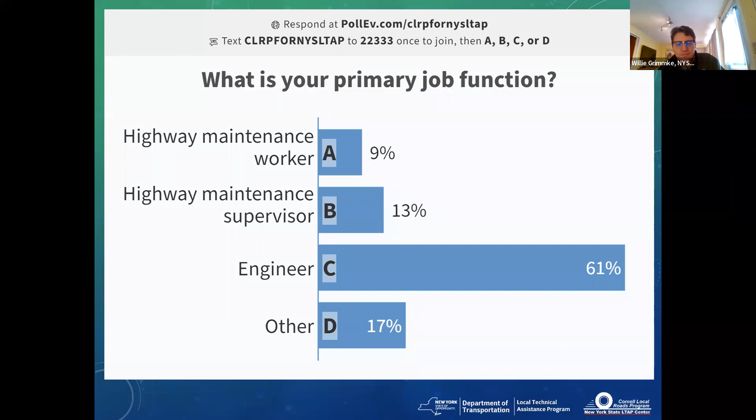So right now, we've got the survey up. What's your primary job function? Highway maintenance workers, supervisors, engineers, or other? And it's looking like we have mostly engineers, a super majority of engineers.

Okay, how long have you done this kind of work, highways and drainage? So it looks like we've got some new people, we've got some folks that probably can give me some instruction, and folks in between.

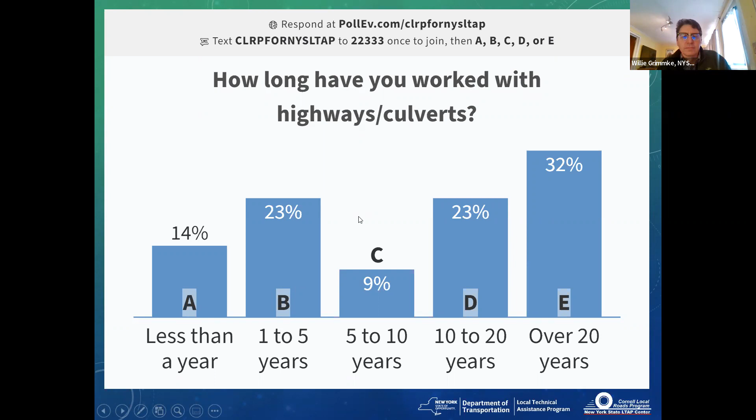Okay, now, if you're responsible for culverts in your inventory, how many do you have?

And it looks like a plurality at this point has over 100. That was my experience when I was in county government. We had some 100+ bridges, and we had well over 200 culverts in the 5 to 20 foot range.

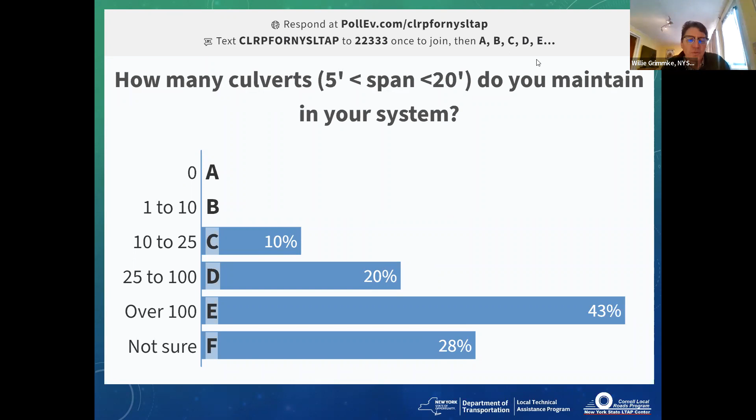Okay, so before I go into the terminology and nomenclature, I'll deal a little bit with why are we here and even having this discussion. You'll see from some of the photos of failures that when a culvert doesn't take the water it needs to take, or it starts to fail, inherently it will cause the road around it to fail. We're trying to keep our roads functional, working, not overtopping, passing enough water so we don't get flooding issues, and not just washing out and having problems with our road that we're going to have to fix.

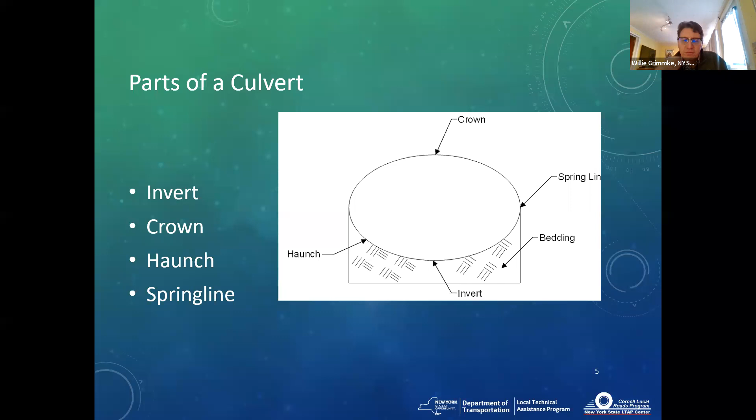So basic terminology: invert is the portion at the bottom of the culvert where the water will flow during low flow situations. The haunch is the area between the invert and the spring line, underneath the culvert where it's supported, the earth area that's supporting the culvert. The crown is the top of the culvert, and the spring line is the widest point in the culvert. That is part way or midway up. Halfway up on a round culvert, it'll be at a different location at a pipe arch.

Okay, and then this is a longitudinal cross section. Sometimes we'll have aprons at the inlet and outlet, which will help to minimize or prevent erosion. Sometimes there will be a toe or cutoff wall, either from the opening of the culvert or from the edge of the apron, which will reduce scour potential. There may be wing walls to retain the embankment that the culvert's buried in. We may have a head wall or parapet.

A number of pipe type culverts will have joints, and the barrel of the culvert is basically the wall of the pipe.

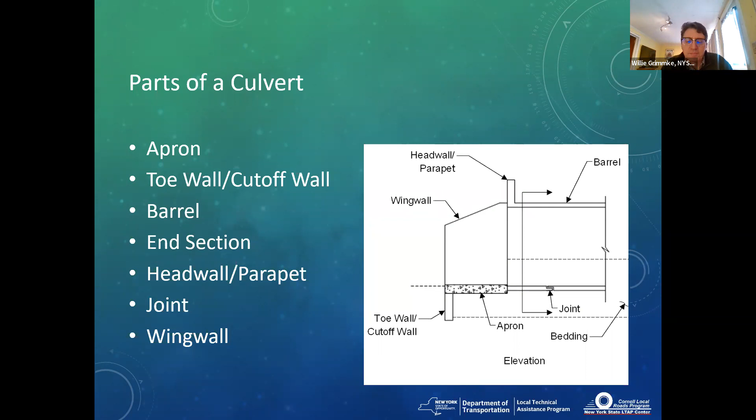Culverts can come in a variety of shapes. They may be round. We may have square boxes. We may have bottomless boxes. We may also have arches, pipe arches, or bottomless corrugated arches.

Materials: concrete is one of the common materials. We had a number of concrete culverts in our county system that had been installed back in the 40s, 50s, 60s. Concrete is rigid. It needs to be adequately bedded when it's set. You have joints every 8 or so feet apart. The nice thing about concrete culverts is you have a smooth interior. Sometimes they can be skewed, but installation of concrete culverts is dependent on having them adequately bedded.

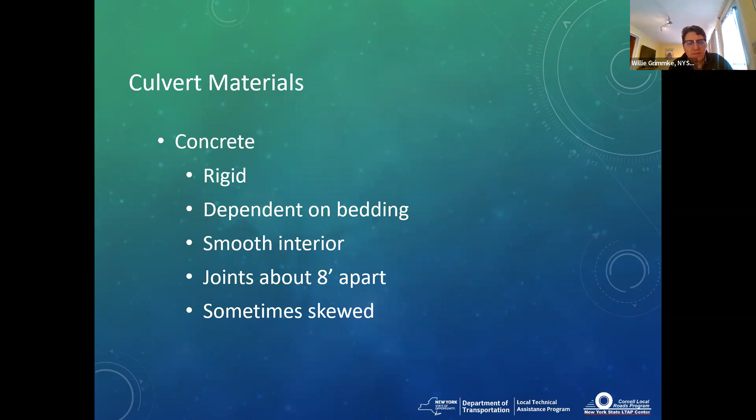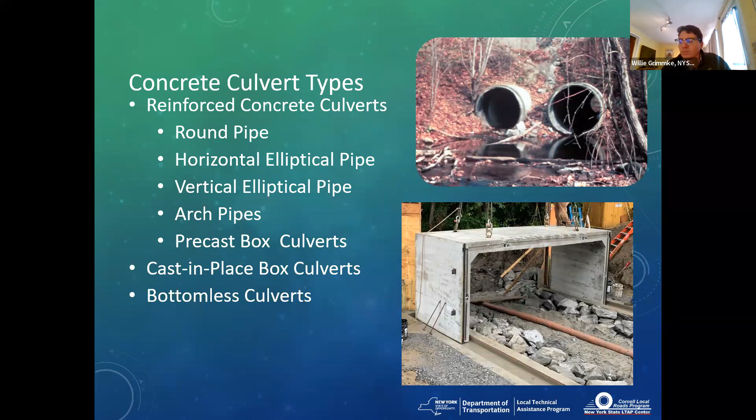Okay, we have a question: for an embedded culvert, do you seed the bottom with riprap at installation time, or just let the stream sediment transport fill it in? I'm going to give you the definitive: it depends. In the photo we're showing here, there is riprap protecting the footing, but natural stream bottom down the middle. That is a common situation with new bottomless culverts, where there will be some sort of armoring along the face of the footing, and then natural stream bottom in the invert area.

Okay, another material: corrugated metal. It is flexible, but the corrugated metal is dependent on the interaction with the surrounding soil. To some degree, the corrugated metal pipe is a form, and the soil is basically doing the work of carrying the loads from above. Corrugated metal does have a rough flow surface, and the joints are going to be about 20 feet apart.

Metal culverts, typically steel or aluminum. You can get the round ones up to 15 feet in diameter. Some plate pipe arches, you'll get up to 50 plus foot spans. And like I said, the material is somewhat flexible, so as the soil moves around it, you can get some deformations in your metal pipe. In solid pieces, round pipe, the joints are typically 20 feet apart. However, with plate pipes or plate arches, it will be a series of plates with a more or less random spacing of joints based on the plate sizes.

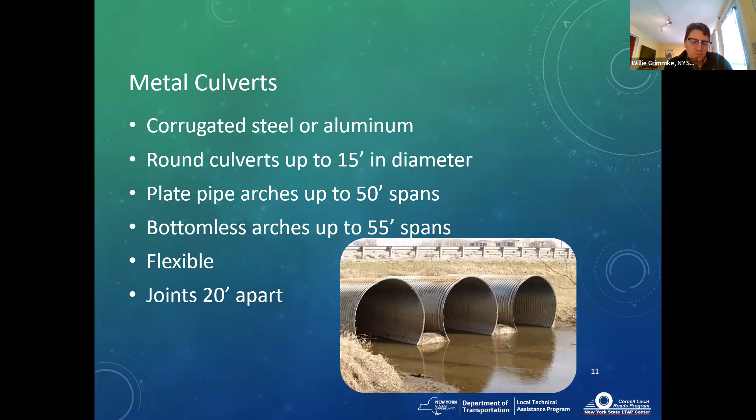High density polyethylene seems to be what's being used for mostly smaller pipes, 5 feet and less. Those are flexible, much like the metal pipes. Smooth corrugated, smooth lined are available. Also corrugated interior are available. And these two, like the metal, are dependent on that soil interaction.

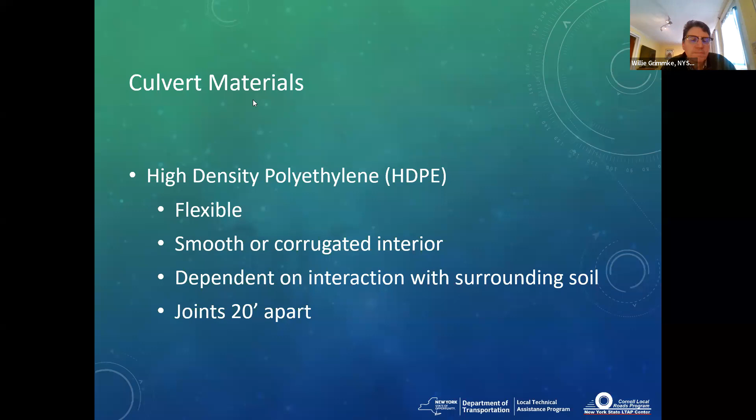This is one of the keys to the whole discussion today. If we properly install our culverts, it will help reduce the maintenance problems we have over time. If you don't install it correctly, you will probably be fighting with maintenance issues over time.

We had one culvert, it was actually a pair of them, and one of the two twins was not installed correctly, and there was a big dent in it. It was a bridge, and it was regularly being identified as a red flag because apparently when it was being backfilled, they backed over it with an excavator.

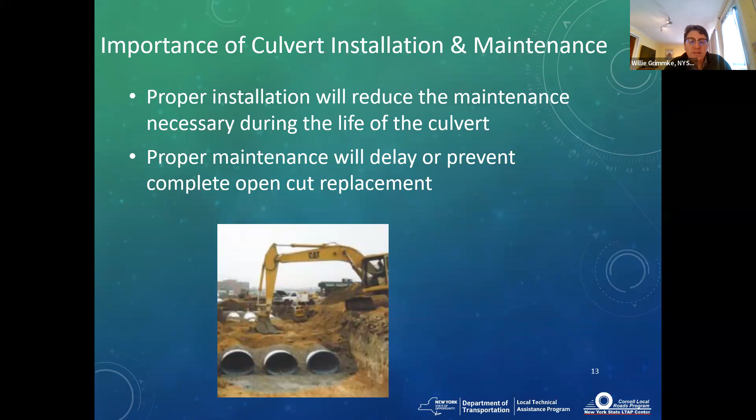But joints will leak if it's not installed correctly. It can deform, displace, and you'll have ongoing problems. And then secondarily, if you properly maintain your culverts, you can postpone or delay having to dig it up and replace it.

So common things we encounter are defects or problems we have to deal with our culverts from a maintenance situation: siltation and debris, leaking joints, settlement, scour. The coatings can be damaged on metal pipes, which will start to accelerate corrosion. We can have issues with our invert deteriorating from either scour or abrasion, or from corrosion. We can get localized damage, cracks and spalls, so a variety of things can go wrong.

So we'll start out with debris and siltation. This is one of those favorite twin tubes, and when you have twins, routinely what will happen is the stream will tend to migrate primarily to one, and we may end up with silt deposition and vegetation growing on that deposited silt, reducing the waterway opening and capacity of the assembly.

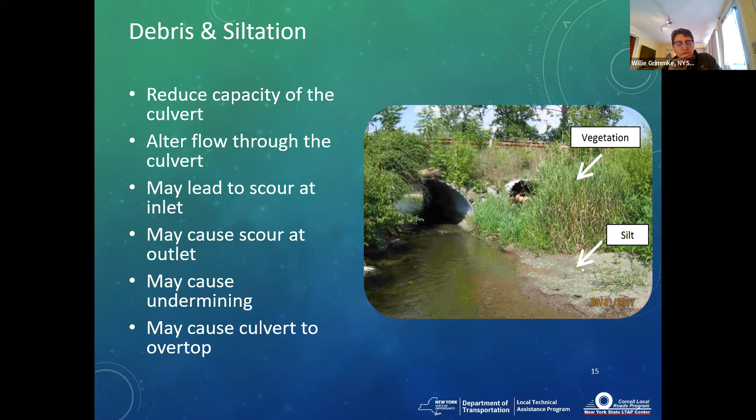This is a general, it depends discussion. Sometimes we want some soil in the bottom of our culvert because it's an embedded culvert and we want to have correct wildlife habitat. However, we're talking about soil that we're not planning to have in the culvert here.

It may be an indication of failed joints. It may be an indication of your stream situation changing and you're starting to get aggradation. But if you have a disproportionate amount of soil in your culvert, it can impair your waterway opening and your capacity. It also may be an indication that you've got joints failing or some other kind of failure that's letting your embankment fill up your culvert.

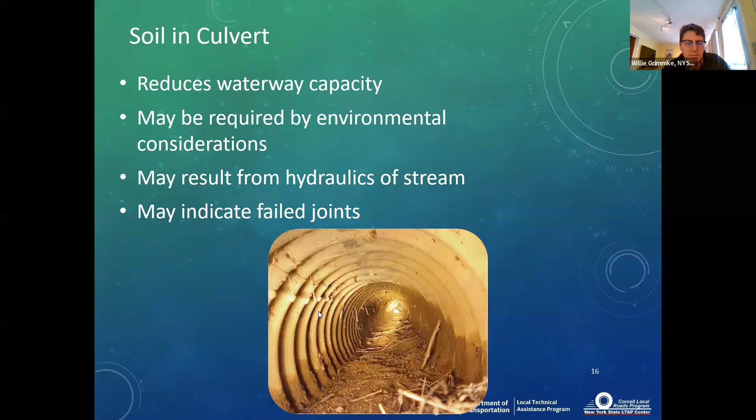Debris in culvert. So this was a fairly significant water flow event, and it discharged, washed a lot of debris downstream, and it got into this twin box culvert and impaired the waterway opening and actually caused overtop or exacerbated the overtopping. So the road overtopped, and as you can see, not only did the road overtop because the culvert couldn't pass the water, but the embankment washed away. So the road had to be reconstructed. This is a stark reminder why you want to keep an eye on debris in your culverts and keep them cleaned out.

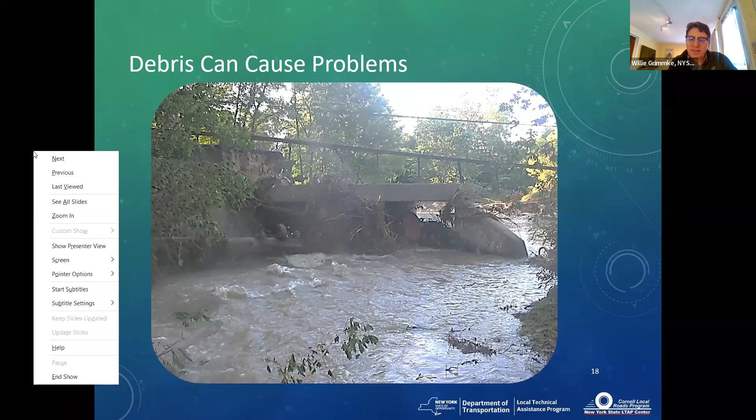So another issue we can encounter are leaking joints. They may have separated or misaligned due to settlement. They could be damaged during installation. We could have poor bedding and subgrade.

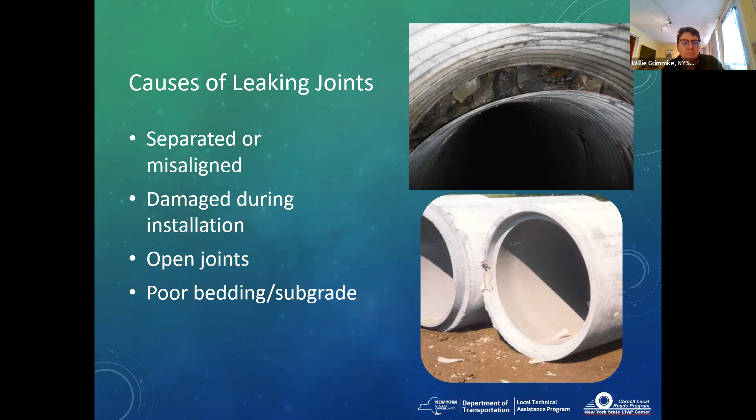One of the cases I observed recently is a lengthy concrete box culvert was installed under what was to become a 40-foot high fill, and it was installed on clay soils. A year later, when that was being inspected, we observed joints opening up between each box, particularly in the middle of the length of culvert, because that's where the highest fill was, and that's where we had the most settlement in the clay. So those joints all had to be sealed up to prevent the embankment material from migrating into the culvert.

Things that can happen with joint defects or open joints: in the photo you see, you've got water infiltration, and this is during the wintertime. So we're going to end up with ice forming. You can get soil infiltration.

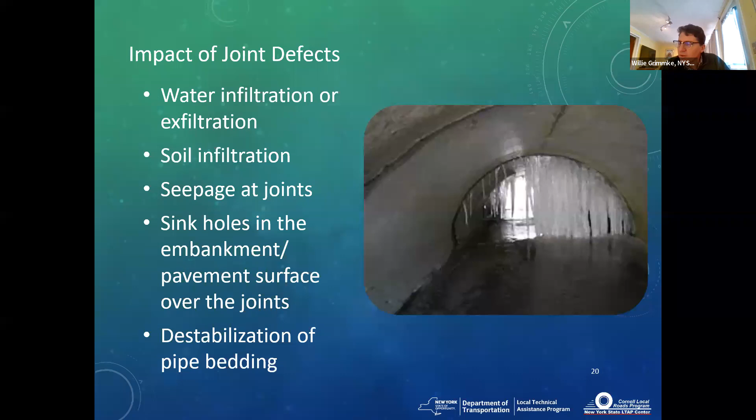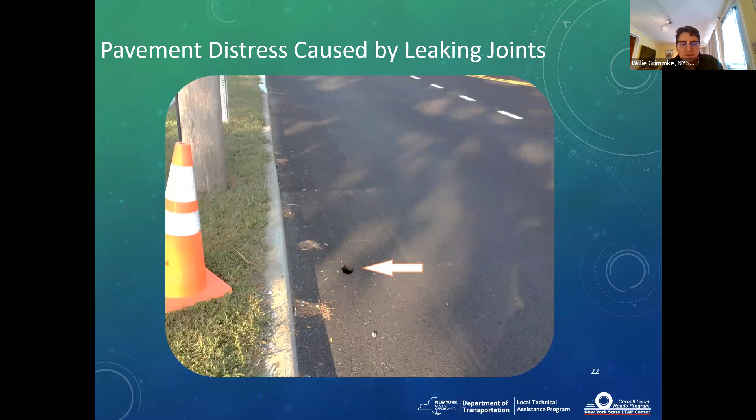This is a case where things on the surface don't really appear so bad. It's a small hole, but what was underneath that hole was a 4-foot diameter by 4-foot deep void where material had infiltrated into the culvert under the road.

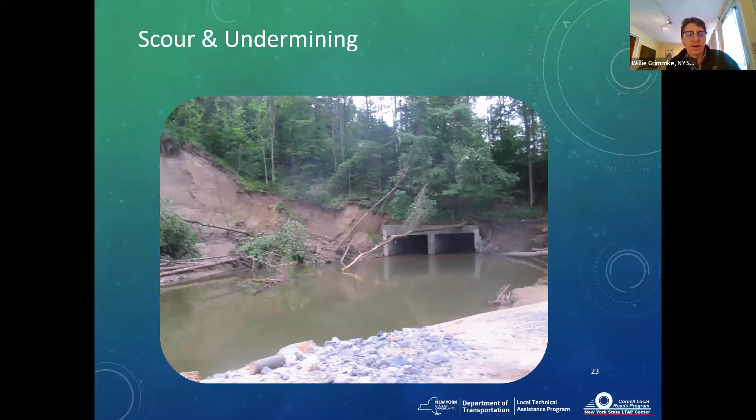Sometimes we can get scour or undermining. This was a twin boxes downstream from the ones we saw earlier. At this location, the embankment was high enough that it didn't overtop. The water coming out of that culvert basically scoured out that hillside next to it.

It can also make joint failures worse or more severe. And from a repair standpoint, you may not be able to reline it, because slip lining is probably not going to be an option unless you're taking a huge waterway area penalty. Here's another one that was deformed, and it's got kind of a bow in the top.

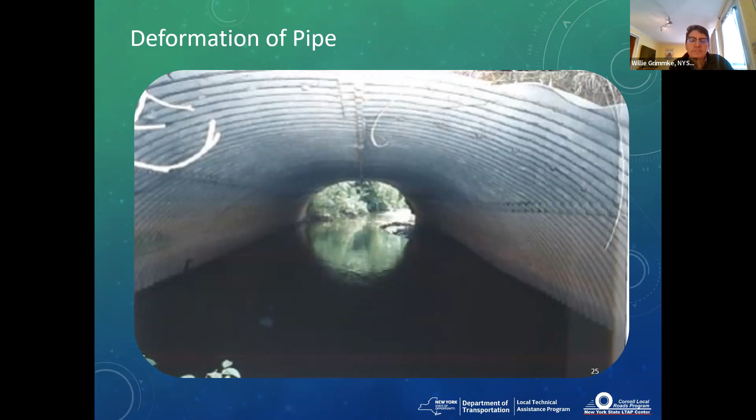We can get cracks and spalls in concrete pipe, like we often get in all concrete. How the pipe is cracking may indicate what the failure mechanism is and what happened during installation. If you have longitudinal cracks at 12, 3, 6, and 9 o'clock positions, it's often due to poor side support. You don't have adequate compaction at the sides of the pipe.

And if it's at like 5 and 7 o'clock longitudinally, it may be due to poor haunch support while the pipe was installed.

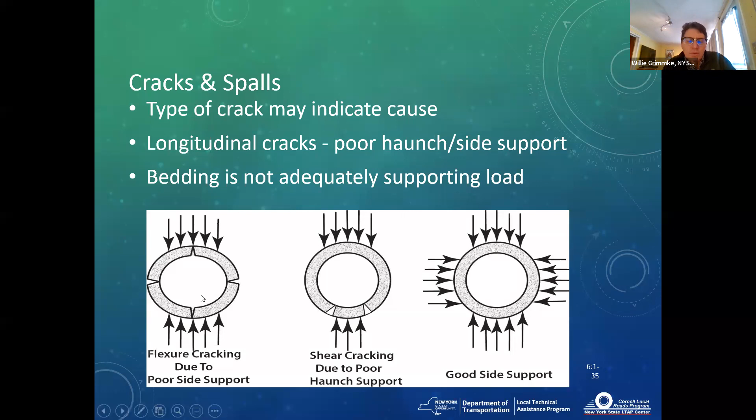If you have transverse or radial cracking, it can indicate how the pipe was installed or bedded. If it's at the invert, it'll be due to inadequate support in the middle of the pipe section. And if those cracks are primarily at the crown or widest at the crown, it's due to inadequate support at the ends of the pipe.

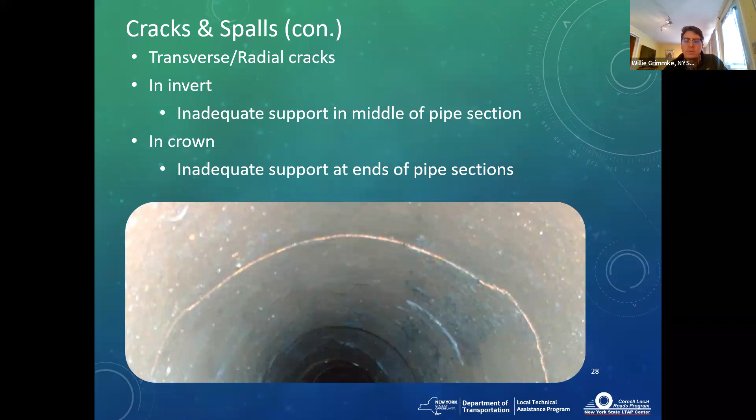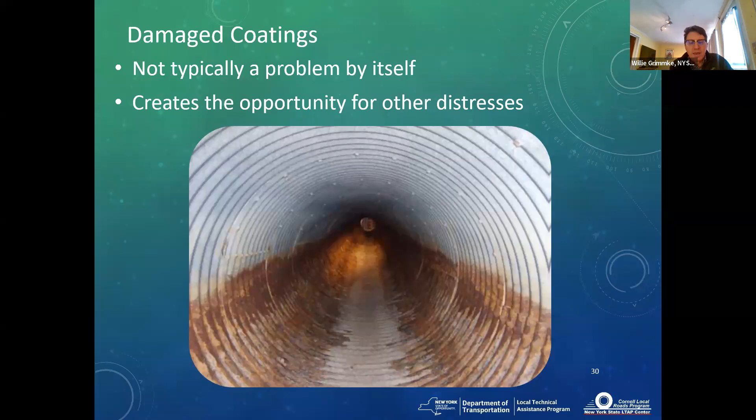We can over time have damaged coatings. This is a case where we've got a galvanized corrugated metal pipe, and I bet you can all guess where the normal high water mark is for this pipe. The galvanization is deteriorating over time. Now, this in and of itself isn't a huge problem, but what it means is that galvanization is no longer protecting the metal pipe, and the corrosion will accelerate over time.

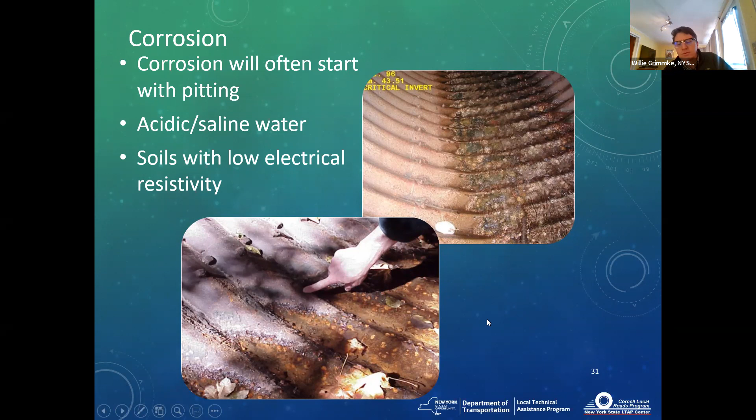How that corrosion appears, it will often start down in the invert as pitting, and then you'll get some flaking and rusting, and the steel will start to go away. Not all soils will support metal pipes. If you have acidic or saline water or soils with low electrical resistivity, you will get accelerated corrosion. I was in Wisconsin last week, and the folks at the DOT there do not use metal pipes because of their soils, and they have accelerated corrosion when they do.

Invert deterioration can happen in both concrete and metal pipes. You may have abrasive bed load, basically carrying rocks and sand that just scour it out, or you may have high sulfates in the water, which will deteriorate your inverts on concrete pipe. And if the invert deteriorates over time, it will weaken and destabilize the pipe as a whole.

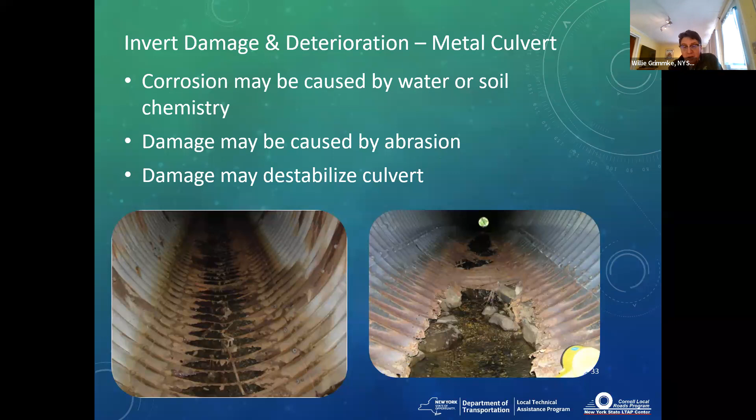Here's some metal pipes where the inverts are shot. Again, water or soil chemistry and abrasion in metal pipes. What happens is the abrasive bed load in the creek will scour off the zinc in the galvanized coating, and then the corrosion starts to work. As you can see with these, over time, with no invert, the pipe is likely to start deforming and collapsing.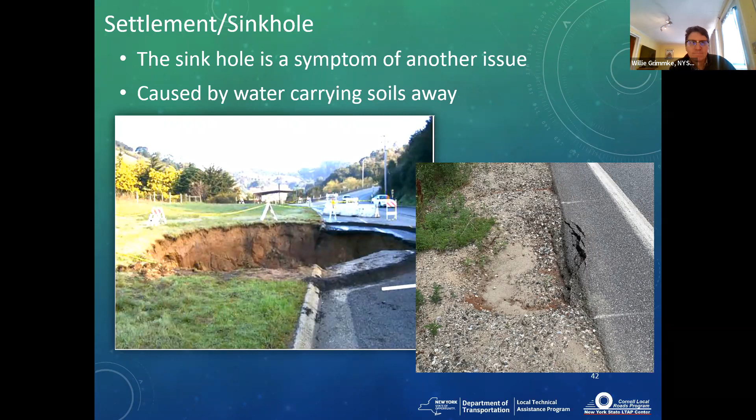Now, here in the photos, we have settlement and sinkholes, and basically water is carrying soils into the culvert and away. So you've either got an invert problem or a joint problem or some other issue where the settlement or the sinkhole, though it's a problem in and of itself, it's actually the symptom of another problem, which is some sort of lack of integrity of your culvert.

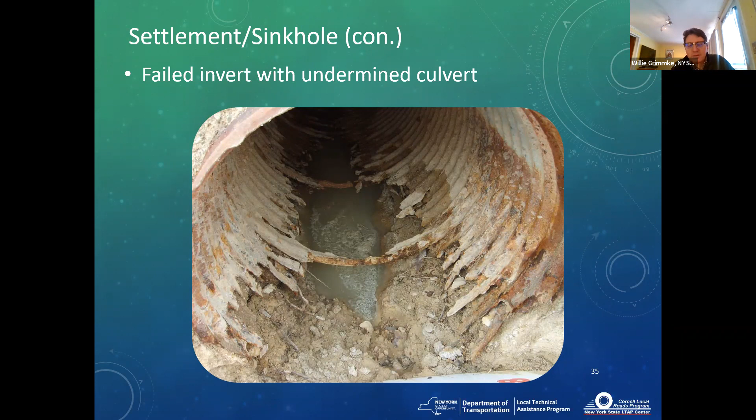So we've talked about all these things that can go wrong. What are some PM steps we can take to help make our culverts last longer? We'll start out with debris removal. PM, we get rid of debris, sediment, vegetation, so our culverts function like they're supposed to, and then we can talk about armoring for scour protection also.

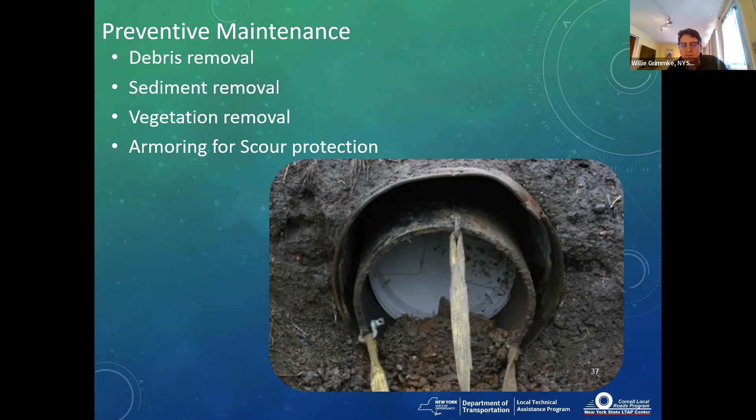How we remove debris or silt is highly dependent on the types of debris we have and what we're trying to get out of here. In this particular photo, we've got a stock fence with sticks and root ball hung up on it. That's the type of thing you can probably send somebody in to retrieve, or pull it out with a cable, something of that nature.

If you've got silt, like we have in the bottom of the culvert, we are going to want to look at a different measure, maybe digging it out. And again, this is a function of what our size of the culvert is and environmental restrictions.

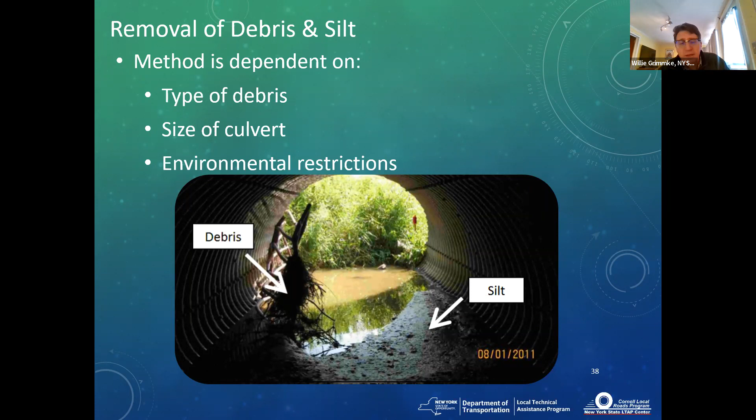So things we need to think about: cleaning it out. How are we going to contain the silt and debris? Because we're going to be beyond whatever nationwide permit or DEC MOUs we have, just letting it all wash downstream. And then if we're putting somebody in there, we need to be concerned about confined space and also any potential contaminants, issues with the water, and careful how we do things because we don't want to wash one of our employees downstream.

Okay, large debris. Variety of strategies for getting woody debris, beaver dams, that kind of thing cleaned up, particularly if it's the inlet and outlet. Excavators or large equipment. Excavator with a thumb works pretty well. Hooking onto it with a cable, putting somebody in there. Probably don't want to be dismantling too many things from the downstream side.

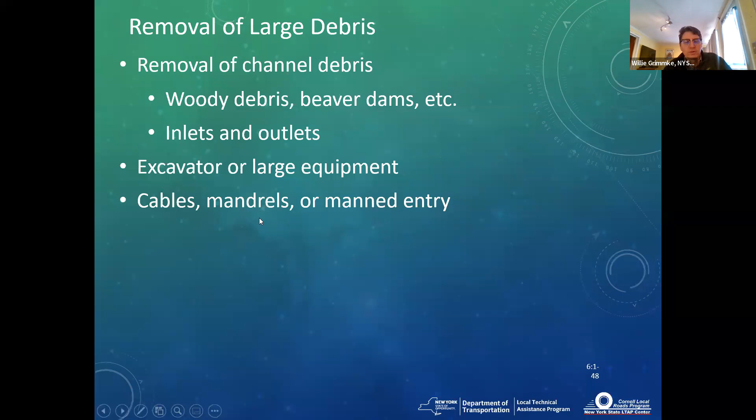And then I've also seen an excavator with a thumb taking a log or telephone pole or something like that and pushing the clog or debris away and getting it out, and that would be a mandrel.

Okay, for silt removal methods, you can, if you have access to them, use a vacuum truck, water jet or sewer jet, fire hose, bucket line, and if it's big enough, a small skid steer. All of these require some ability to capture and retain silt so you're not impairing the waters.

I'm going to back up with water sewer jet. When I was in county government, we had an old one that the sewer district had retired, and for relatively small diameter culverts, they worked pretty well. However, you have to be careful that you don't want to run a sewer jet through a culvert that either has open joints or perforations in the invert. You can cause yourselves quite a bit of problem doing that.

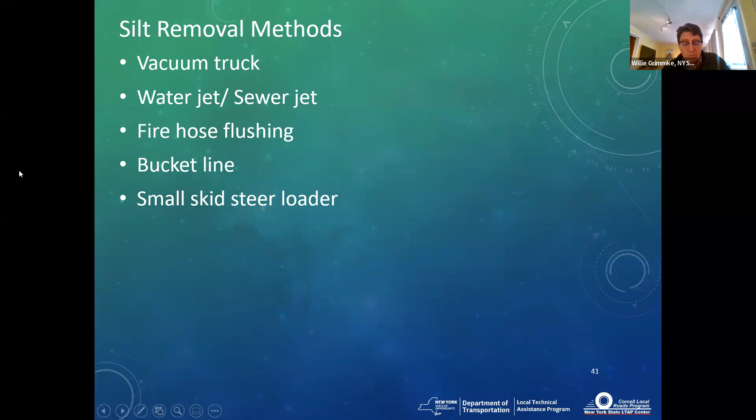Okay, scour repair. If you have scour issues, you can look at repairing them, but you're going to want to talk to your hydraulics engineer or get a hydraulics engineer involved so you're using the appropriate materials. In addition to stone, you may want to grout things in place. You may want to look at geotextile, cut-off walls, etc.

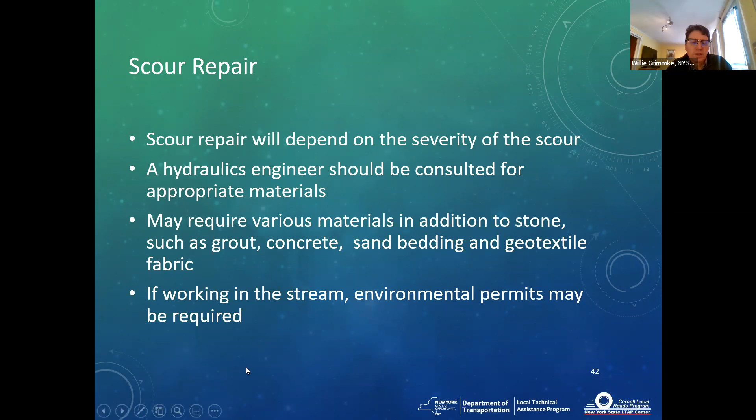And you want to know how deep your maximum probable scour depth is going to be, and also what size stone you need to be using, because if you use, let's say, fine stone fill or number 3 stone or something, and you've got a fast moving stream, all that's essentially going to do is wash downstream in the next big event. And also with any stream work, you need to make sure you have the required environmental permits.

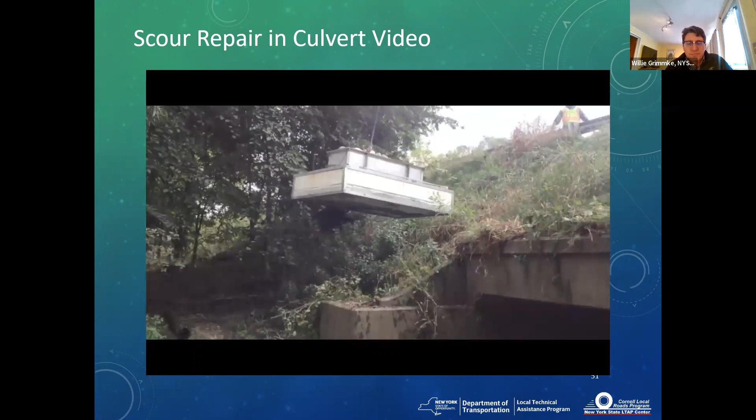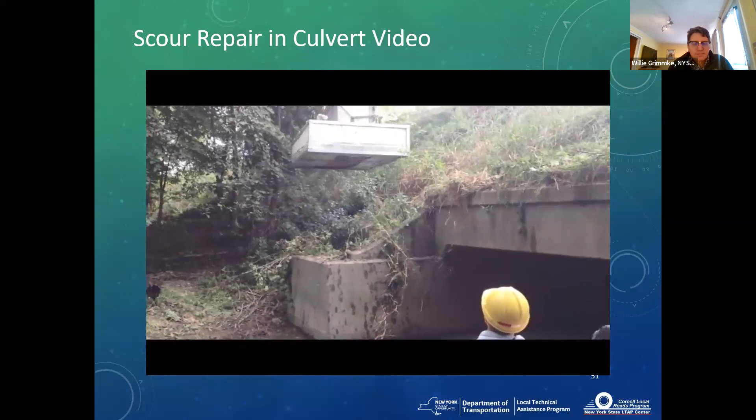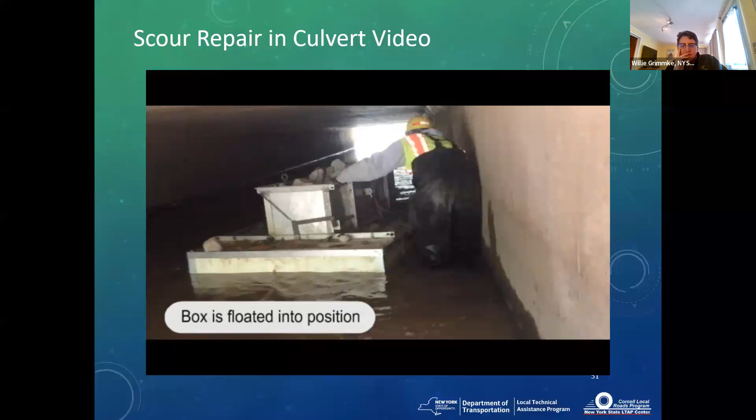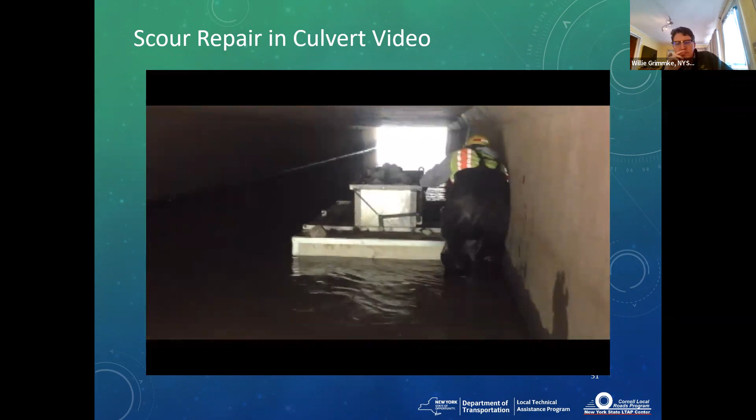And you can kind of see at the bottom, under the hopper, it's open. So they float the box into place to get the riprap where they want it, and drop it in.

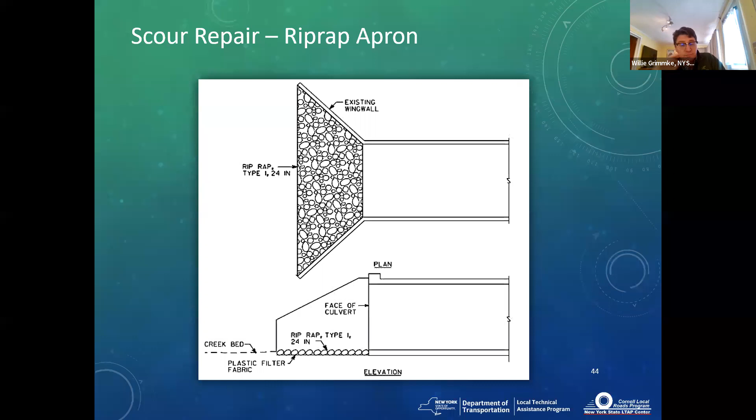Another thing you can do is create a riprap apron at the inlet or outlet if you're having erosion or scour there. You should also look at a concrete apron, basically in that area where the velocity is increasing as the water is going into your culvert.

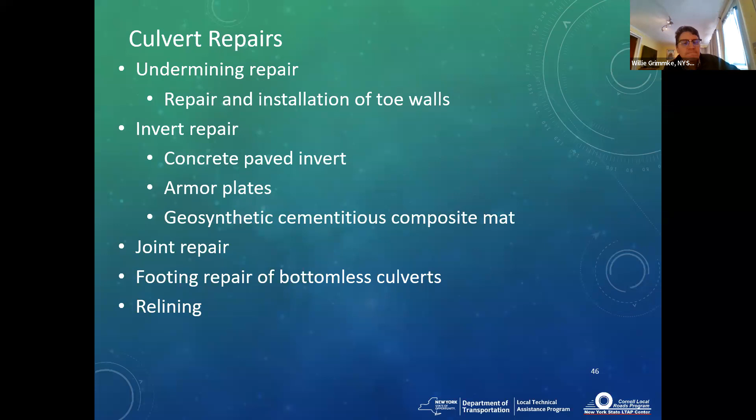If you have potential undermining, you can look at installation of toe walls. We can also do invert repairs as the invert is being distressed or failing, and joint repairs.

A toe wall or cutoff wall may prevent undermining. It's not going to prevent the scour hole - you may still get a scour hole developing in front of it, but you want to make sure that cutoff wall is below the elevation of the maximum scour depth, so it won't undermine the pipe.

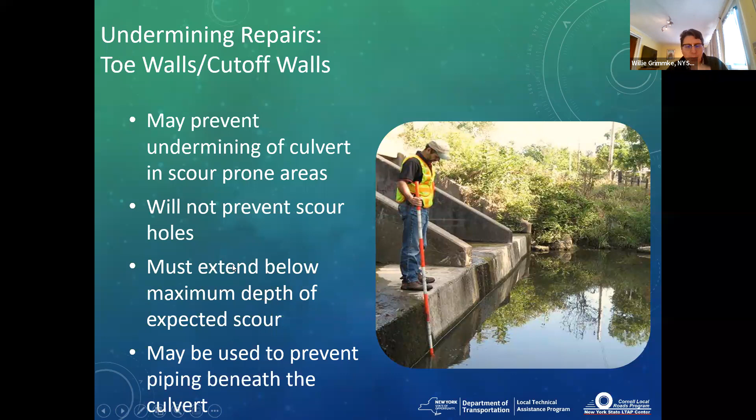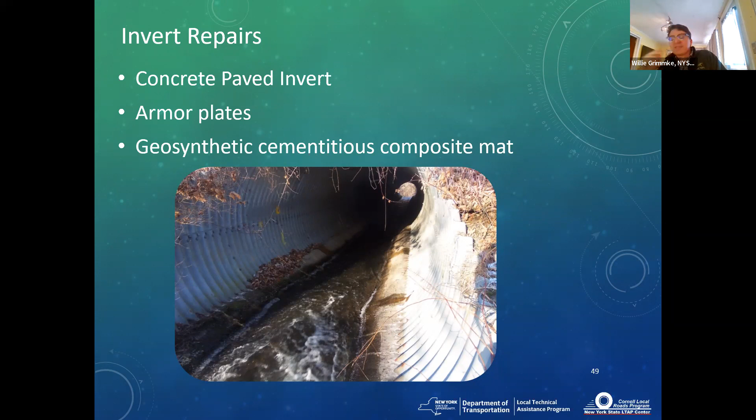You can also use armor plates or a geosynthetic cementitious composite mat, and we'll talk about that in a minute. So for a concrete paved invert, you have to divert the stream, clean the area, form and place concrete, let it cure and restore the stream flow.

In this detail, the concrete is reinforced and anchored to the bottom of the culvert, and there is some minor reduction in waterway area. However, you get a smooth invert, and it does restore the structural integrity of your culvert. So it can buy you time before you have to replace it.

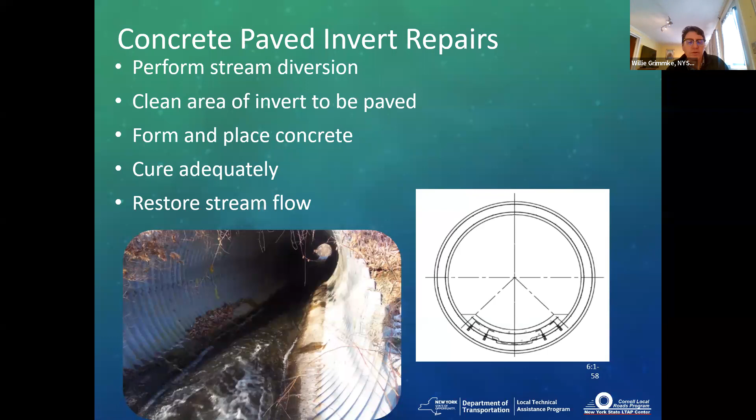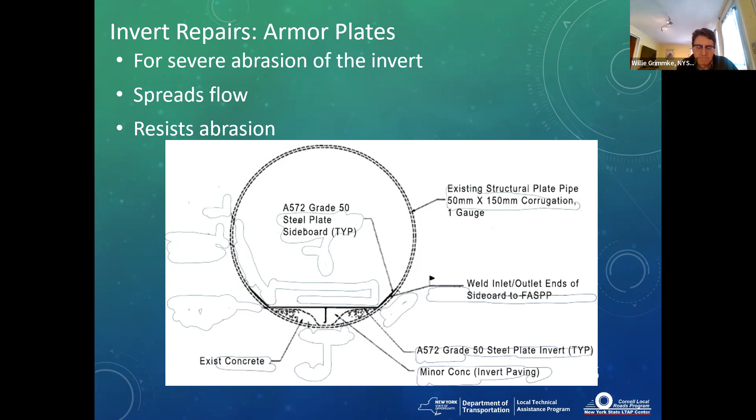Another invert repair technique is a geosynthetic cementitious composite mat. Essentially what this is, it's a sandwich of non-woven geotextile with a mortar mix in between, and the pieces are laid down shingle style, attached to the bottom of the culvert.

This is done after the stream's diverted and it's cleaned and any holes are repaired. Then water is sprayed on it, allowing it to cure, and then you have a new, basically concrete shell type of invert.

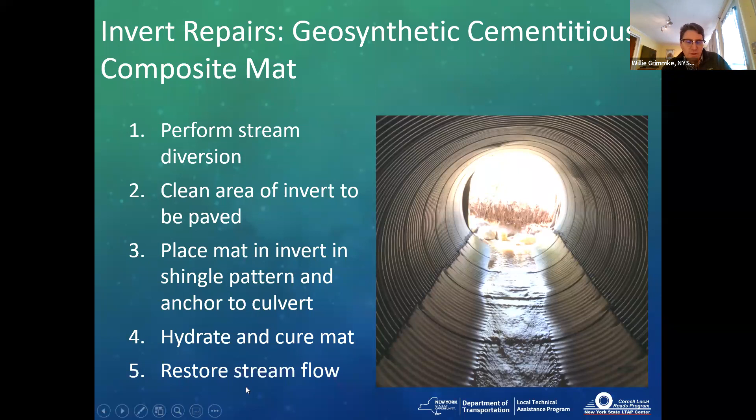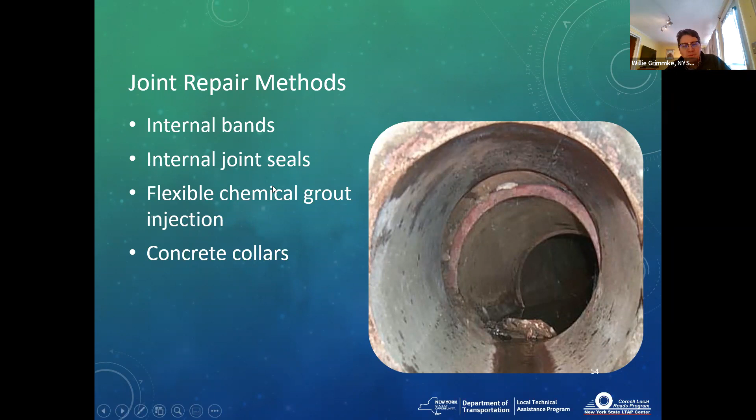Now, when we get to joints, depending on your material and depending on the situation, you've got some steps you can take to repair your joints so they don't leak and put soils into the ground or into your culvert, hence causing voids and sinkholes. So you can use internal bands, internal joint seals, flexible chemical grout, or concrete collars.

Internal bands are generally soil tight, not necessarily watertight, and the band is placed over the joint inside and tightened into place. You can see the bolts in the photo at about 4 o'clock and 8 o'clock, and those are tightened into place, forming a seal and keeping the joints from leaking. This can be used if they're separated but in reasonably good alignment, and you want to be careful with this type of installation that you get the bolts up out of the flow as much as possible so you're not catching debris.

Flexible chemical grout injection can be either injected into the joints from inside the culvert, or drilled in through the embankment and injected into the joint area. That's what we did on that box culvert that settled - it went in from below and filled the joints. It was like expanding foam insulation, like the great stuff you would use around your house, and it seems to be doing a good job sealing those open joints off.

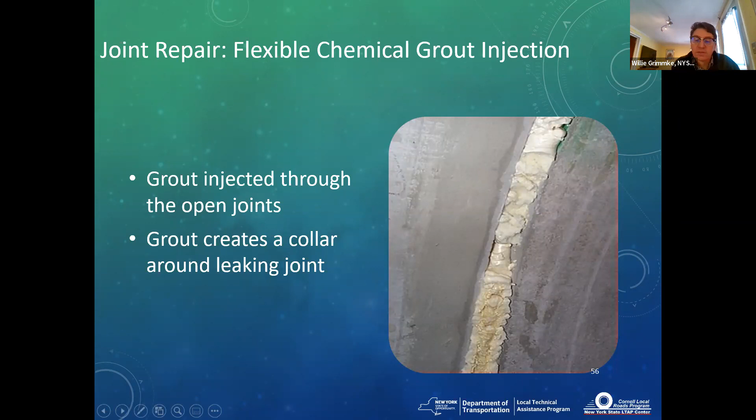In more extreme cases, you can pour a concrete collar around your open joint, but you have to excavate to get down to it to pour the concrete collar. The other thing you need to be very careful of while you're doing this is make sure you form up adequately around the open joint, so when you're placing the concrete collar, you're not filling your culvert with concrete.

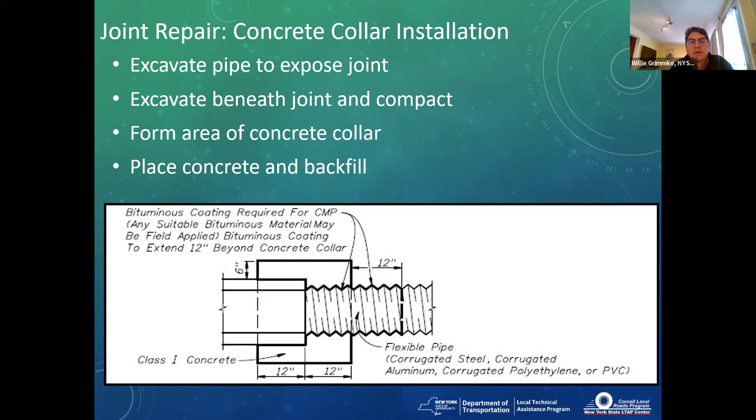Okay, relining. We'll talk about some of the relining options here. We can slip line with a variety of materials. We can do shotcrete, spin cast concrete liner, or cured in place pipe.

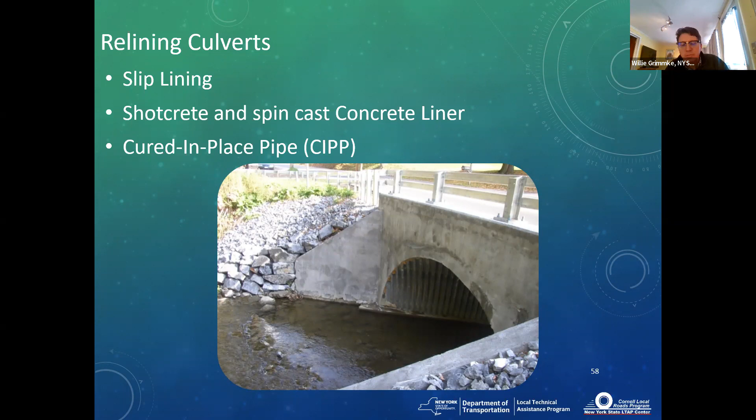And the photo you see here is a completed slip line corrugated metal pipe or corrugated metal arch. So materials that can be used for slip lining include corrugated metal pipe or corrugated metal plate pipe and plate arch.

Smooth interior metal pipe, which you see in the photo, or high density polyethylene. Depending on what you're looking for in waterway opening, you can get the snap-together polyethylene smooth line thick wall pipe, or if you can afford the reduction in waterway area loss, you can use normal corrugated HDPE.

Here's a series of slides of the Washington County crew installing that plate pipe arch or plate arch. Basically they cast new footings just inside the old footings, and use picks to erect the pipe and erect the arch, then slide it in place.

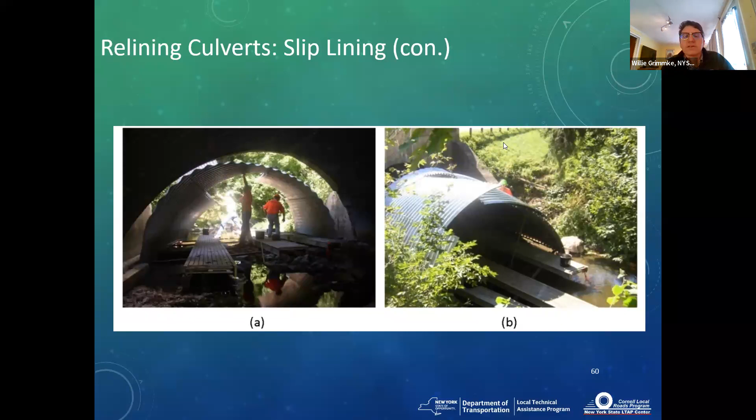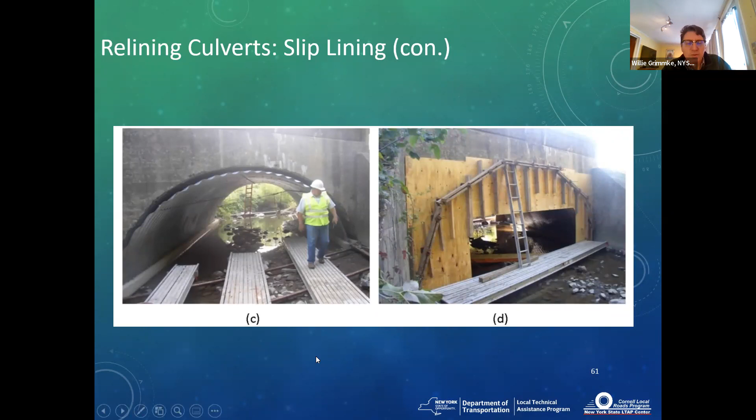This particular location, the original arch was built in the late 30s, and it had started to fail just above the footing because the water would routinely come up above the footing elevation and cause corrosion. But it lasted like 70 years, so this new installation should also last another 70.

The forming on this particular installation was a little more challenging because of the skewed ends. The culvert was on a skew, so making sure that we didn't have concrete oozing out when we were filling that annular space was a problem, and that required a little more time forming it.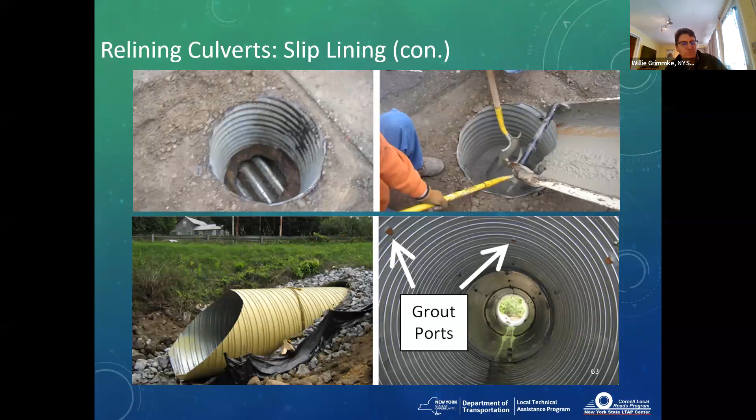For other applications, if you're using a smooth interior pipe and sliding it in place, as shown lower left, you would have grout ports in the pipe as seen in the lower right, and grout is injected into that annular space. So essentially we have a layer of steel, a layer of concrete, a layer of steel - a sandwich pipe installation.

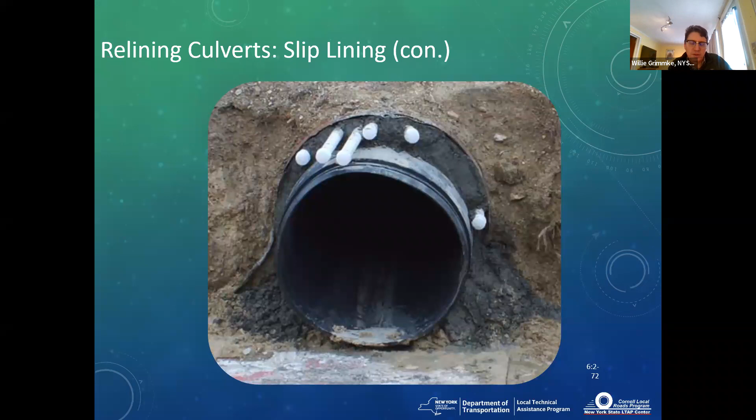Now we move on to shotcrete and spin cast concrete liner. Basically, this creates a new concrete interior for your pipe. It's pretty close to uniform thickness over the existing one, and unlike the slip lining options, which aren't real good with distortions, this essentially goes right over them. So the pipe needs to be cleaned and any voids grouted, particularly if you have issues with your invert.

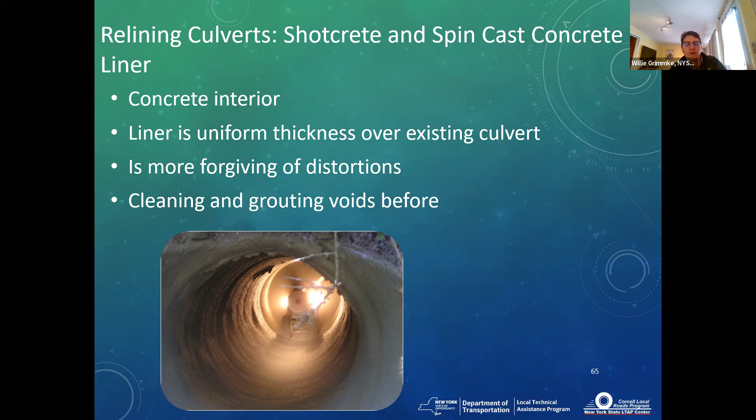And what you see in this photo here is a spin casting operation. Essentially it's just a mobile spinning shotcrete machine, and it sprays concrete all around the interior perimeter of the pipe. For larger locations where somebody can get in there, shotcrete can be used.

There was a federal aid project up in Essex County several years ago where on the road that's the approach to the IP plant, I believe it's Shore Airport Road, and shotcrete was installed up there.

Joe wants to know, how can you guarantee that the grout fills the space totally between the new pipe and the existing pipe? Basically, in response to that, it's kind of an iterative process. Best practice is to start at the bottom and fill the bottom up and let that set, and then come and do more.

But also, it will require some inspection. So once it's in place, inspection staff will go in and basically sound the metal pipe, and you can tell if there's a grout void or not. And then if there are any voids, a new grout port will need to be installed, and those void areas will need to be filled.

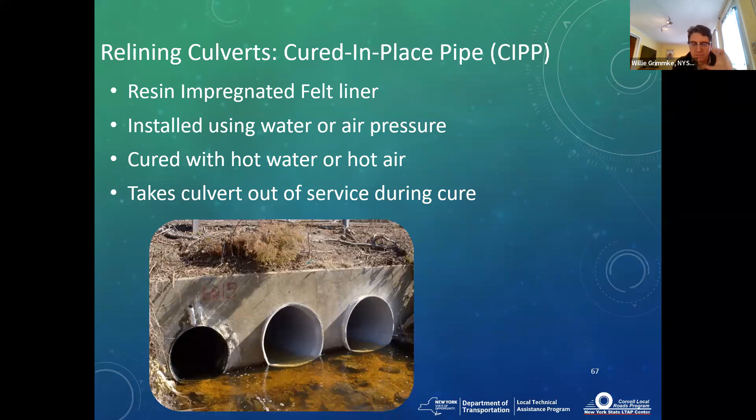Now, the process for this is it's impregnated, and essentially it's inside out. The liner is fastened on an insertion assembly, and then it's filled with water, and the water will push it up against the existing pipe.

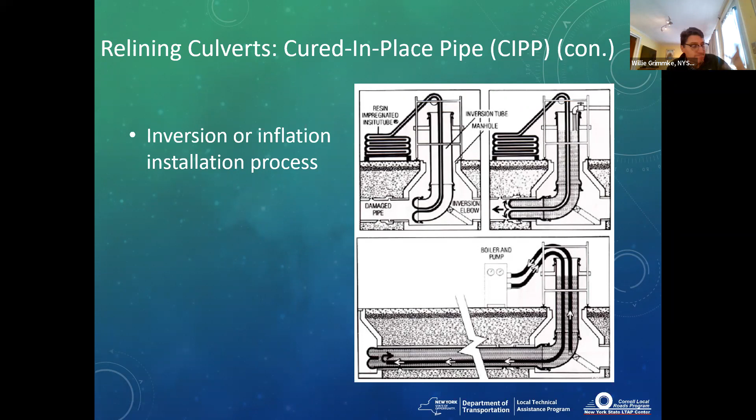And then once the whole pipe is in place, the water is heated to cure it. Once you get beyond the cure period, you have a new liner, and this is what the liner looks like when it's coming out the other side. You can see the felt, it's inside out. After this is complete, this will be cut away, or the water drained and cut away, and then you'll have a brand new liner.

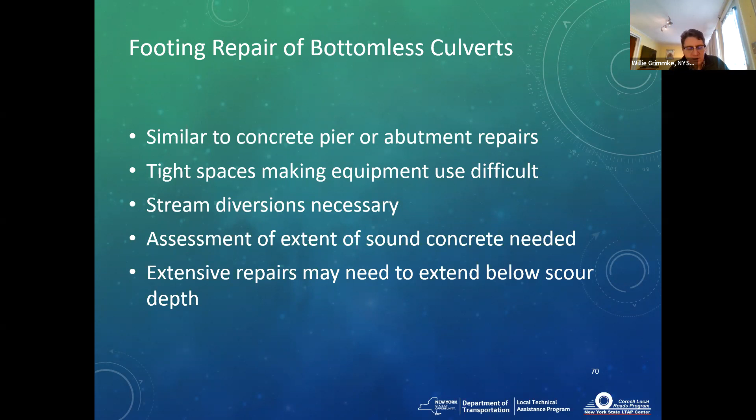In Washington County, our crews did a couple of these, and in this particular case, we needed to repair the footing and used a couple of HDPE pipes for stream diversion so we could work in the dry. Unfortunately, during the middle of the project, it was summertime and we had a cloud burst, and it overtopped our cofferdam and washed one of those sections of pipe downstream.

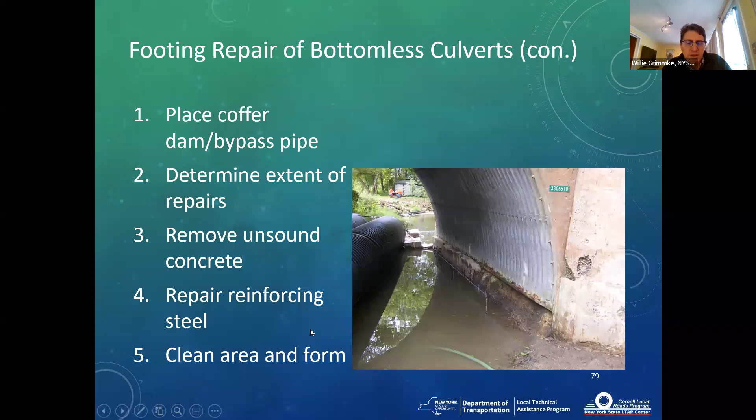But the basic technique for that is remove the unsound concrete, get to the sound concrete, repair any reinforcing, clean, form, place. And then if you use a bonding agent, do that. Place your concrete, cure, and reestablish your stream.

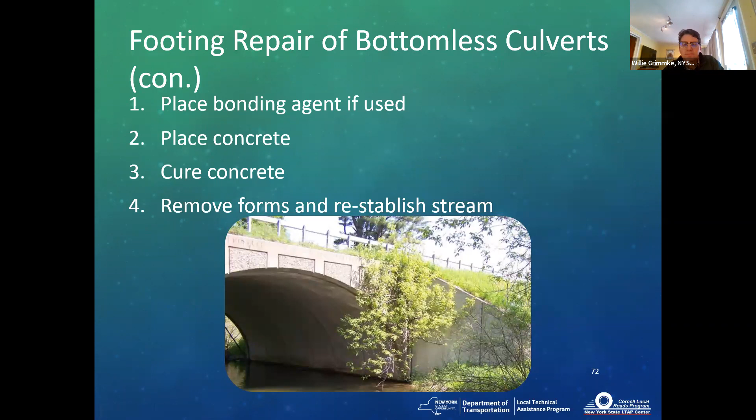Okay, so we've discussed common deficiencies, we've discussed some PM, and we've discussed some repair of culverts. So now we've got a few poll questions.

So corrosion in metal pipes could lead to which of the following? Invert damage, deformation, undermining, or all of the above?

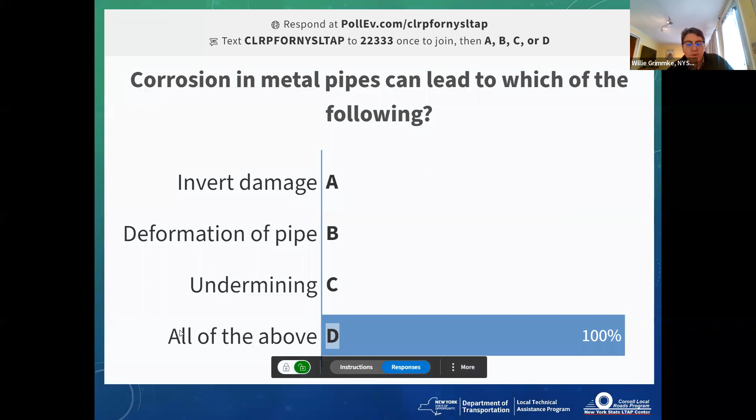Okay, so we're at 100%. Yeah, corrosion can lead to invert damage or deterioration of the inlet of the invert. It could also lead to deformation as the pipe becomes structurally unstable, and it can cause it to be undermined. So all of the above is correct.

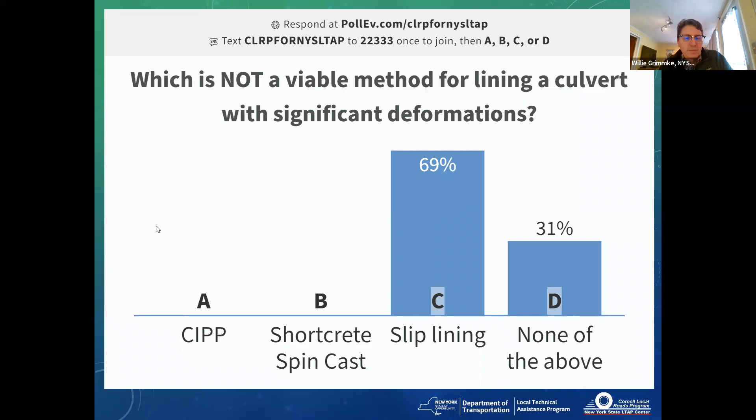I am going to, okay, and I have two questions. Do towns and counties do hydraulic designs for every culvert, or only over a certain size? In our county, when we were replacing pipes, if we didn't have issues, we would just replace them in kind. However, if we had issues, we would do some hydrology and hydraulics design.

And secondly, have you ever heard of a downstream landowner seeking damages after a washout on a public highway? Yes, absolutely, they will seek damages. They may not be able to recover them, but people will often seek damages when they feel as though their property was damaged and it's not their fault. And you'll have to talk to your attorney about how best to defend that type of thing and make sure you were doing the right thing in the first place.